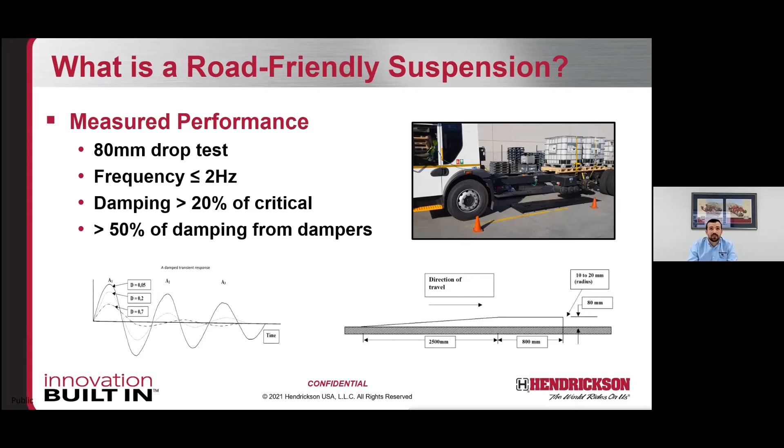Why have road-friendly suspensions? Why are they a thing? Well, it's to protect the road, as the name implies. I'm not a pavement expert, but at a very high level, the basics tie into the damping requirements.

Basically what the damping does is — you hit a pothole, you get a bounce, and then it's how large are the bounces and how many bounces you get subsequent to that initial input from a pothole. So reducing the size of the oscillation means having a high enough level of damping.

And then it's the distance between the oscillations. If you hit a pothole, how many times, or what distance from that initial input is the next input, and the next input after that — that ties into road damage. If you've got a lot of high impacts close together, that's more damaging than a high impact followed by a good distance until the next bounce. So that ties into the frequency component of the requirements I mentioned on the previous slide.

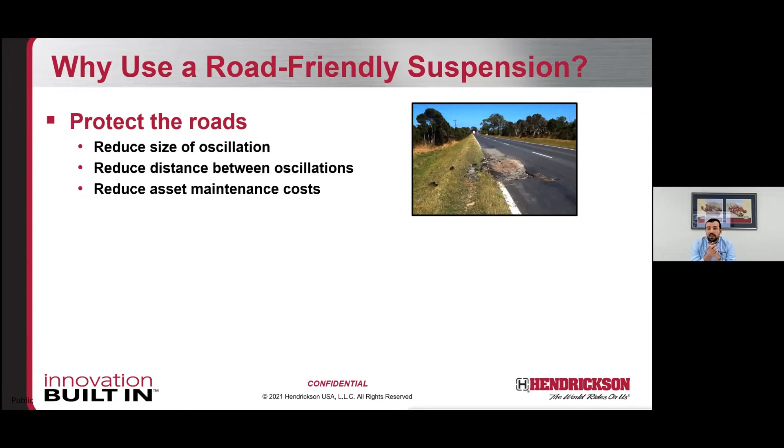All of that basically reduces the cost to asset owners or road owners in maintaining roads and fixing potholes, etc. If you own a road, that's a great thing, but you want to incentivise the operators who own the vehicles with these suspensions to comply. So the way they do that is to give operators more payload or higher axle loads on their vehicles — higher mass limits is the main scheme used as a mechanism for doing that.

I'm sure a lot of people listening are familiar with that scheme, but there's a number of requirements to running higher mass limits, those higher axle loads, one of which is that the suspension is road friendly. Mass management is required. In some states, Intelligent Access Program or IAP is required, where there's some tracking on vehicles. And there are some limitations around the different roads you can travel on.

There are actually other schemes as well which don't require road friendly suspension, which maybe is a little less known. CML, concessional mass limits, is another tier within this system, and that doesn't actually require road friendly suspension. So it's only the top tier, high mass limits, that requires that. There are a few other schemes that tie into road friendly, but the main one is HML. As I mentioned, it's all based around improving productivity for the operator and end user, carrying more payload on the same truck.

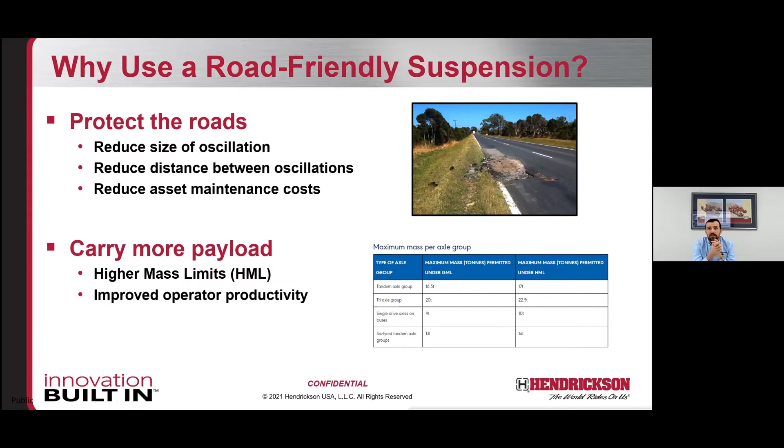Most people watching this presentation are probably interested in Australia, but as some background, which does tie into how it's been implemented in Australia, road friendly suspension was first introduced in Europe around 1996 under a directive shown there, if you want to look it up. The intention in Europe, as I understand it, is to show equivalency to air suspension. So air suspension is deemed to comply, meaning there is no testing and compliance of air suspensions in Europe for road friendly. Another alternative pathway to getting extra mass on the axles is also to have a load sharing suspension. It's the same but different, and there's probably a lot less prevalent use of road friendly in Europe as a result of those alternative pathways.

Another small difference is that hydraulic dampers are specifically called out in Europe, whereas I'll talk about Australia in a minute. Multiple test methods were defined in that framework, and I'll go into a bit more detail now on those test methods.

You saw on the first slide an image of a step that was 80 millimeters high. Basically, you can drive over that step at that profile at 5 kilometers an hour and measure the response - that's one method. Another method is you can lift the chassis by 80 millimeters, leave the axle on the ground, drop that chassis, and measure the response there. The third method, specifically called out, is pulling the chassis down to 1.5 times the static maximum axle load, letting it go, letting it oscillate, and measuring that response. And then there's a fourth method, which is basically any other method shown to be equivalent and approved as being equivalent to those methods mentioned.

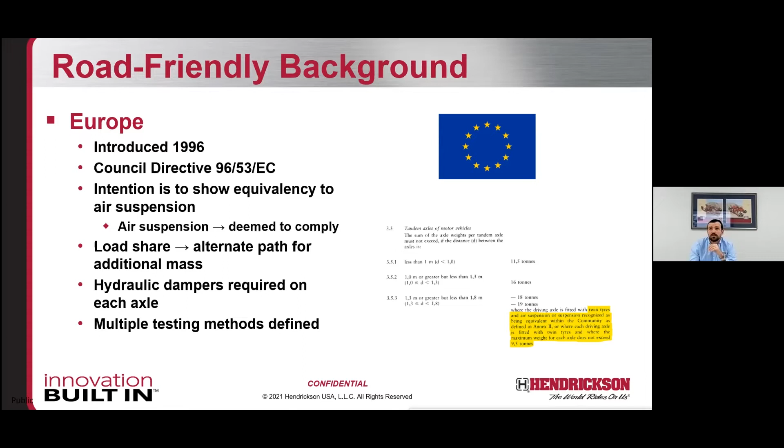So that was all defined within the European framework, and it's called out in that document referenced up the top there. Moving on to Australia, which is probably what people are more interested in - it was introduced not long after, in 1999. It's outlined in Vehicle Standards Bulletin 11, or VSB 11 as people talk about it most commonly, and it's actually a national code of practice.

A couple of differences to what's in Europe: air suspensions are not deemed to comply, hence they need to be tested to meet those criteria. I mentioned before there's a hydraulic damper requirement in Europe - there's no specific requirement for hydraulic dampers in Australia. Load sharing is required within 5% between axles, which is an addition to the Australian requirements.

But the test methods are actually just adopted straight out of the European requirements. As an annex or appendix to the VSB 11 document, the European document is appended in there, with the specific parts that talk about test methods and a few other things. So that's purely taken straight from Europe - they're exactly the same in terms of how you test.

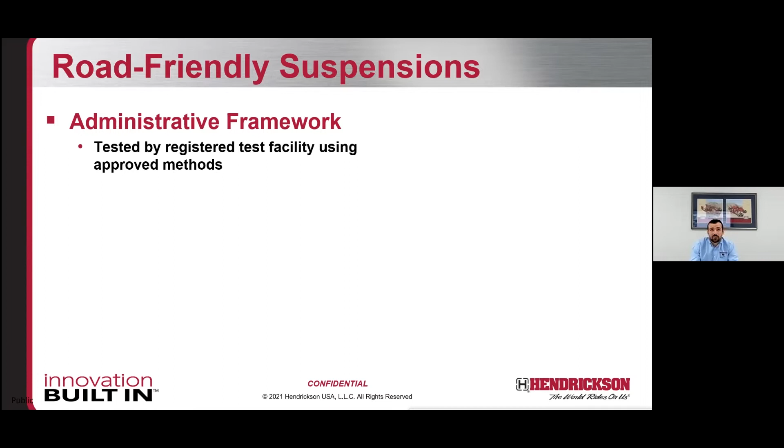So how is it administered in Australia? Basically, in order to test a road-friendly suspension, you need to be a registered test facility - you can't just be anyone with the ability to do so, you've got to be registered. Once the test is completed, it needs to be reported and submitted to the department, which tends to change names fairly frequently, but I think it's currently the Department of Infrastructure, Transport, Regional Development and Communications. They review the report and make a decision on whether it's approved or not based on the information in that report. Then they'll assign a unique ID, an RFCN, Road Friendly Certification Number, and a certificate gets posted online.

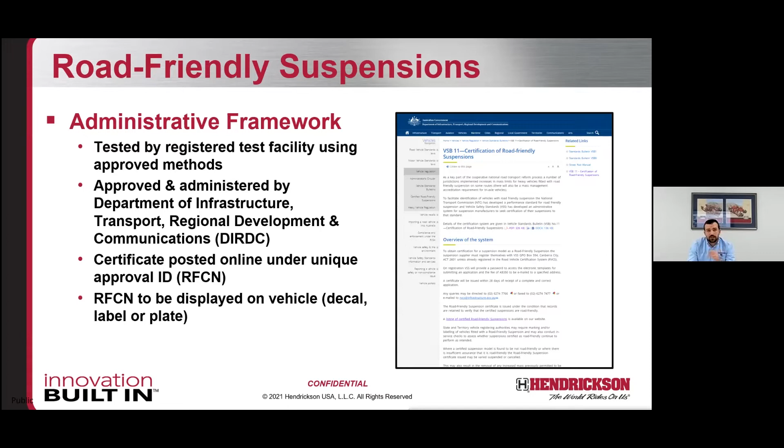Another requirement is that the number is actually displayed on the vehicle for it to be considered road friendly. I'll go into what's posted online on the next slide in a bit more detail.

There's that ID number for that suspension, and a number of variants you can add to that certificate, and for each variant the specific parameters are called out. So the number of axles, the type of suspension, whether it's overslung or underslung, maximum axle spread within that suspension if it's more than one axle. The damper part number is specifically called out, the smallest size of the tyres, the highest tyre pressure you can run, the air spring or airbag diameter, and then a reference drawing which outlines the dimensions and installation of that suspension.

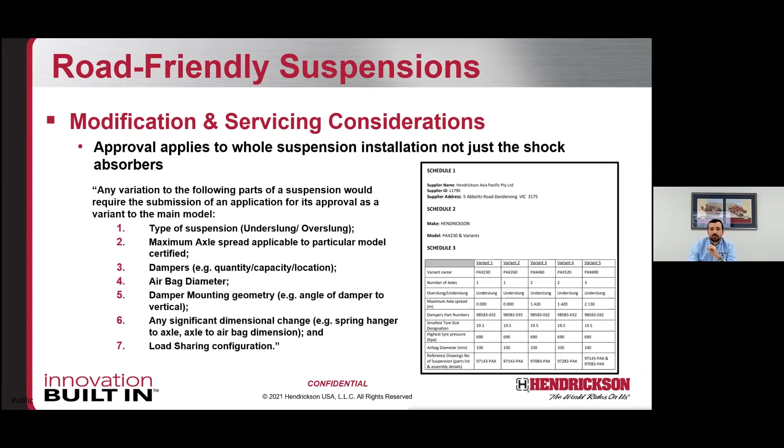If you change the shock absorber, even if it's from the manufacturer but a different part number, it has to be listed on the certificate. If you changed an air spring, all those sorts of things would mean a new variant or that particular certificate would need to be updated, which is also possible - you can submit a variation on a variant if you've changed something and it still complies. So that's the framework you're working within to stay compliant.

Moving on from some of that dry stuff to something I enjoy a bit more, which is suspension design. I just thought I'd briefly talk about some of the implications on designing suspensions in terms of road-friendly and meeting those requirements.

The main thing with road-friendly suspensions in terms of design that might be different to non-road-friendly designs - it may not be, but typically you might need to add more damping in order to meet that damping requirement of 20% or greater. So if you add more damping and leave the geometry the same, say you imported a suspension from another market that had a lower level of damping than 20%,

and you wanted to maintain where the shock absorber was mounted - say it was a suspension with a shock absorber providing the damping - then you would need to increase the force on that shock absorber, or at a particular velocity, or the performance curve on that shock absorber, to get a higher damping level.

Then something you need to consider is the strength of the mounting points - that's a key consideration in that scenario. The suspension might be designed from scratch to already have that level of damping, and it may be okay. But if you bring in a suspension with lower damping and need to increase it, the mounting points might need to be stronger.

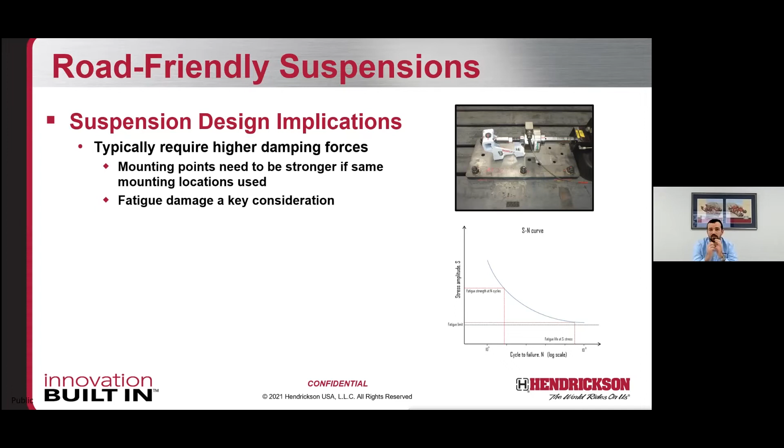And then for air suspensions, it's typically the damping that's a focus. So an air suspension would typically have a lower spring rate, and that's because it's a variable spring rate by nature. It's controlled based on ride height. And so as you increase the load, the pressure increases and therefore the spring rate increases. And so that allows you to have a lower spring rate because it adjusts to what's required to carry the load. So generally your focus would be to make sure you're meeting that damping requirement.

For a mechanical suspension, it's typically a more fixed spring rate, and therefore the maximum capacity of that suspension would typically drive the spring rate, meaning it's typically a higher number. And therefore, to meet the road-friendly requirements, you might also need to focus on that frequency criteria as well as the damping, given you would typically have a higher spring rate for those types of suspensions. So those are some of the considerations depending on what type of suspension you're looking at in terms of ensuring it meets road-friendly requirements.

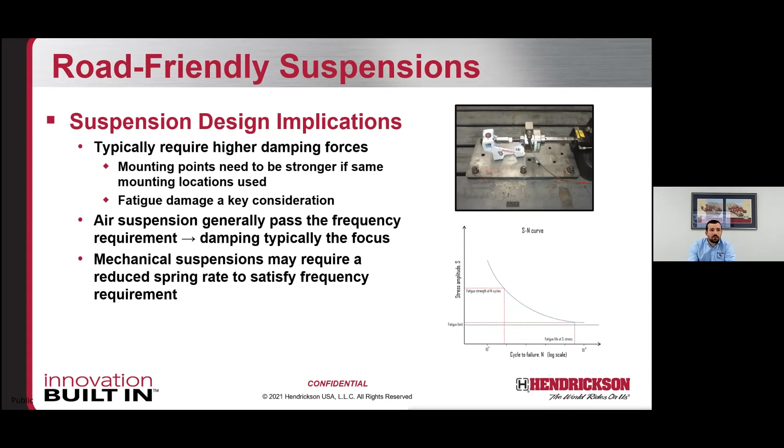And then finally, some main considerations to take away when installing or maintaining a road-friendly suspension. So has it been designed and validated for road-friendly levels of damping, which I spoke about in terms of fatigue, and if you're taking a non-road-friendly suspension and turning it into a road-friendly suspension, have you considered the full life of that suspension and whether it can withstand those loads?

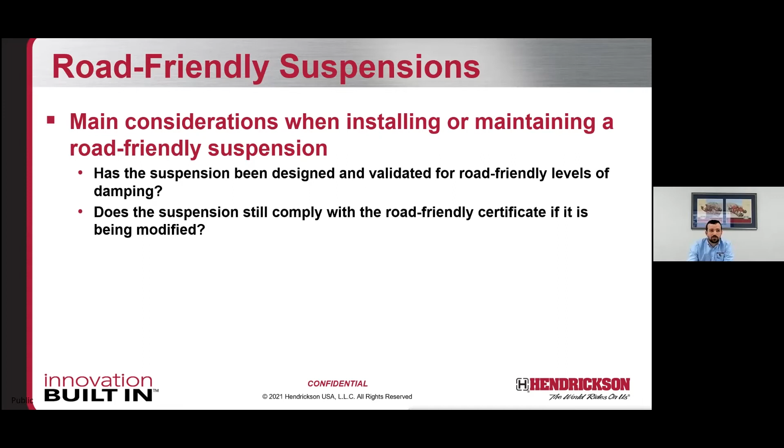And then if you're maintaining it, does it still comply with the certificate? So have you changed the geometry, or have you changed the part from what was listed on and certified on the certificate if you're going to maintain and modify in any way?

And then another point is suspensions often will have attachments that directly attach to a chassis or a cross member, rather than being self-contained within the suspension, depending on the suspension itself. So it's also important to consider whether the chassis, the cross members, the attachment points can also take the level of force going through the suspension if it's transmitting a higher load through particularly the shock absorbers generally. And for shock absorber mounts, is a doubler plate required behind the shock mounts, or is there some sort of extra reinforcement required?

So yeah, they're probably the main things to consider. And yeah, I hope that presentation has given you something new, something useful, something to consider. I look forward to receiving some questions during the conference if anyone has any that they want to ask. So I might hand over to Adriaan to talk a bit more about shock absorbers and road-friendly suspensions.

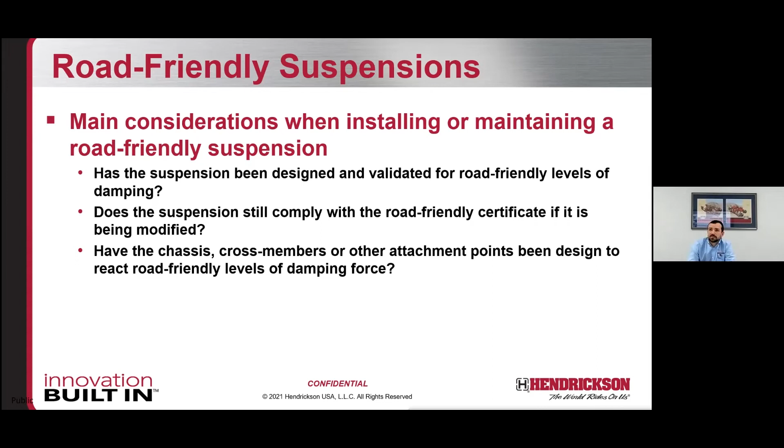Thank you, Luke. Hi everyone. As Bob said, I'm Adriaan. I'm engineering manager for Powerdown, Australia. I'm really excited sharing this session with Luke, and I'm looking forward to some interesting conversation around this fairly technical topic around road-friendly suspension.

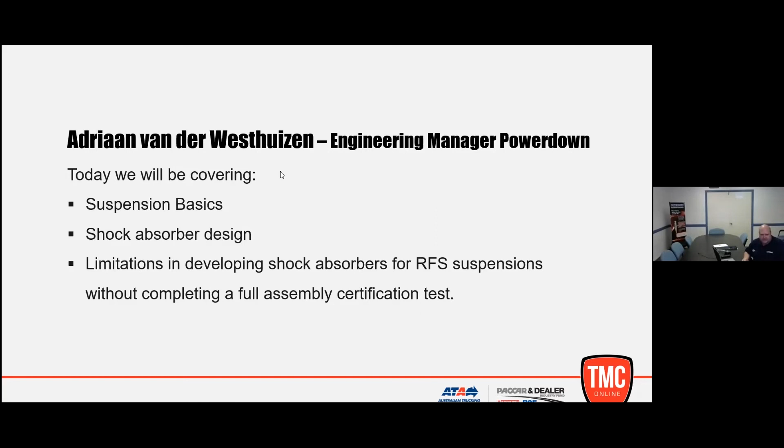So I'm going to kick off just covering some suspension basics, some basic shock absorber design, and then I'm going to talk about the limitations in developing a shock absorber for RFS suspension without completing a fully assembled certification test.

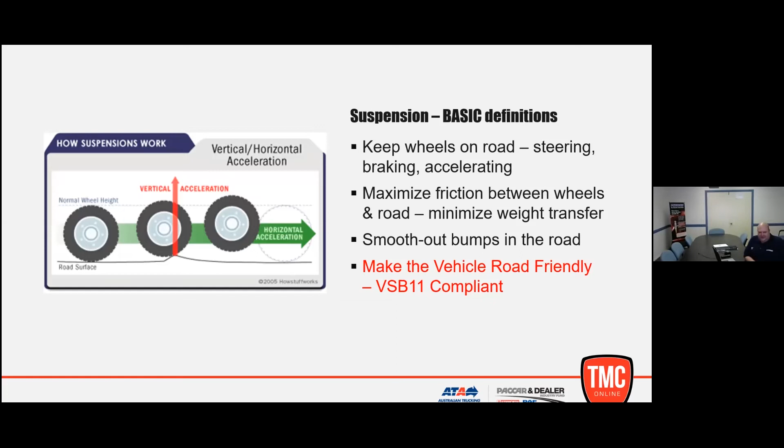So just quickly on the suspension side of things. Your suspension needs to keep your wheels on the road, so we maintain good friction that allows us to corner and brake. To a big extent, the suspension also provides some comfort to smooth out some of these vibrations. And for today's topic, very importantly, your suspension is a big part of making your vehicle compliant to VSB 11, or road friendly.

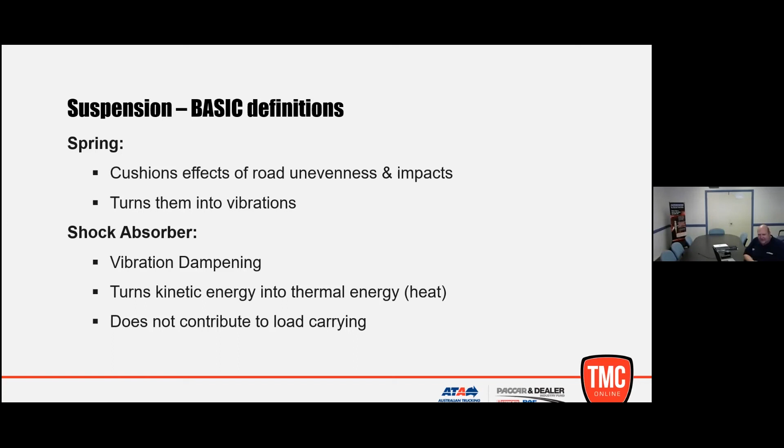So basically the springs allow that cushioning. They carry the load and absorb unevenness in the road, but a side effect is they turn these motions into vibration. The shock absorber is then tuned to remove these vibrations, to dissipate that energy. It's important to note the shock absorber does not contribute to the load carrying capability of the suspension. Fundamentally, there are two main types of shock absorber designs.

They're mainly twin tube or monotube derivatives. We'll see on modern trucks the new Tesla truck seems to use some sort of monotube technology, but predominantly, especially in the Australian market, twin tube shock absorbers are the go-to technology.

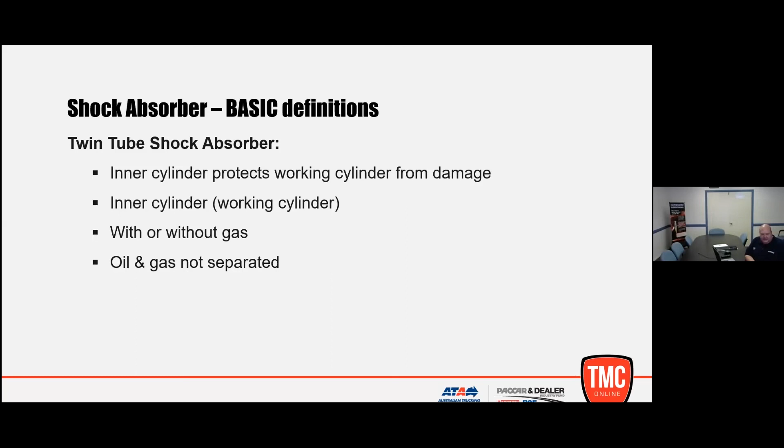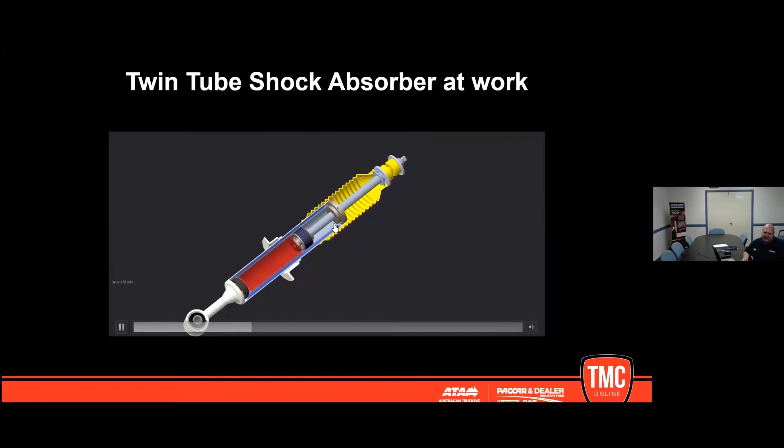For twin tube shock absorbers, you've got two tubes - an inner and an outer tube - with different configurations, with or without gas. As per this video, this is a twin tube design, more like a strut type style, but you can see the inner tube with lots of valving. We'll talk about that later - the main piston as well as a floating piston. On the outside we have this reservoir tube, which displaces the oil as the piston rod enters the body. For a monotube, we only have one cylinder, and the gas and oil never mix.

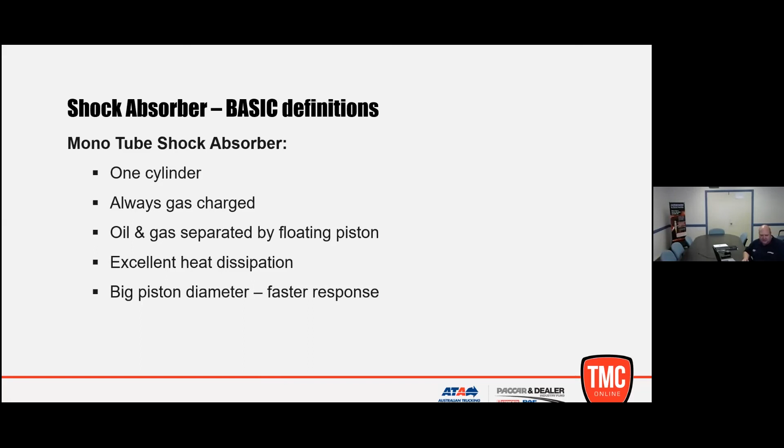It's got better heat dissipation and a bigger working piston for the same body size. On the truck side, I think the common application for this is some Kenworth cab dampers, which use monotube technology. So you can see the main piston moving inside - you've got an oil and gas separator with a floating piston, and all your valving happens on the main piston. So there's no foot valve in this design.

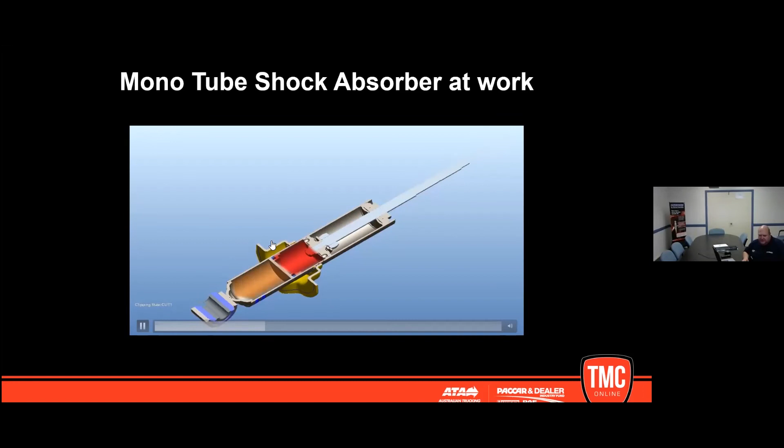So just some characteristics of the shock absorber - we've got the length, the collapsed length and the extended length, called the stroke, and mounting points. Very important, like Luke mentioned in his presentation, is how this damper basically mounts to the vehicle and to the axles. Your mounting bushes, your selection of those materials and design, also plays a big role in how vibration is translated into the rest of the structure.

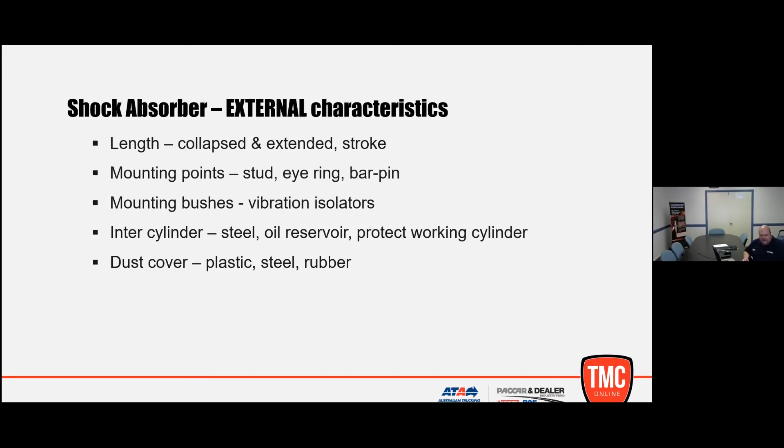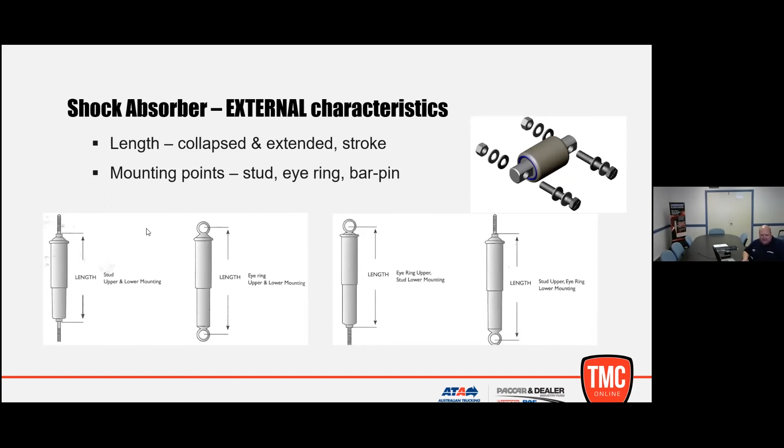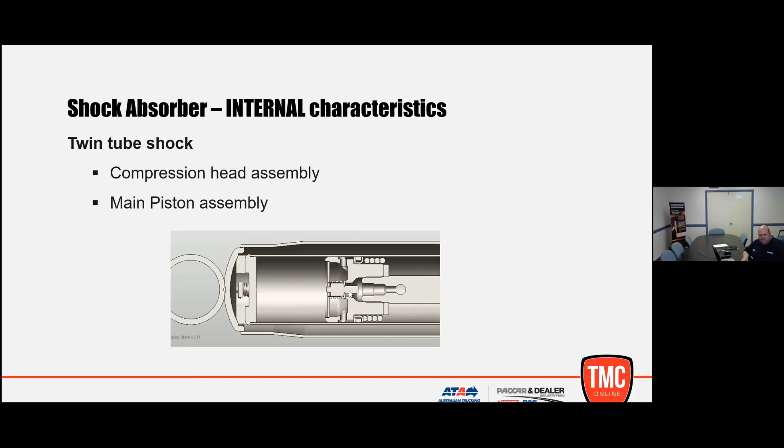Internally, if we look at the shock absorber, as we said a twin tube, we've got this foot valve which plays a big role in your compression valving, and then you've got the valving on the piston. So there are lots of different designs to deal with the recoil damping, and then obviously some compression dampening happening on the main piston as well.

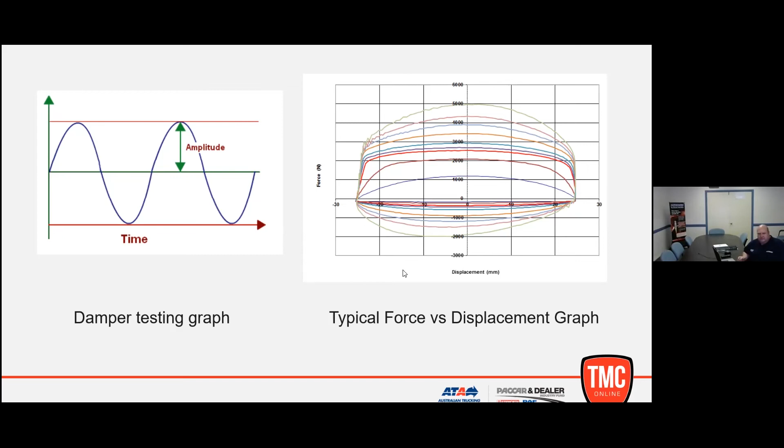So how dampers are tested is basically we cycle them through a sinusoidal displacement graph programmed at a set frequency, and then we can record the forces generated. According to international design standards, this is a typical force displacement graph. Each of these lines above zero basically represents a recoil damping force at a velocity. Under the zero mark, the negative forces are compression forces generated by the damper at specific velocities. These velocities are really important when we design the damper for road-friendly suspension, so we'll get to that.

The typical shock absorber today has got fairly intelligent valving, if we can call it that. It's speed sensing, so it's non-linear is what I want to highlight. The damper reacts differently at different velocities. So if we talk about the non-linear characteristics for a shock absorber, it means you're not going to have a set output of force relative to the velocity - it can adjust itself through a wide spectrum of velocities.

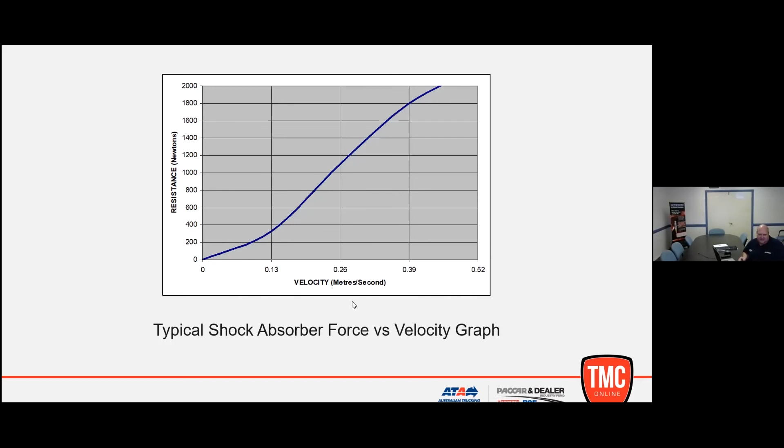So a typical self-adjusting or speed sensing damper will have a basic orifice stage - all these stages are fairly important when designing a damper for road-friendly suspension. At the lower speeds and lower velocities, those forces we generate we call the orifice stage. Then there's a blow-off stage at medium velocities, and then we go into a restricted stage at higher velocity - that's the amount of oil we can displace through a certain design.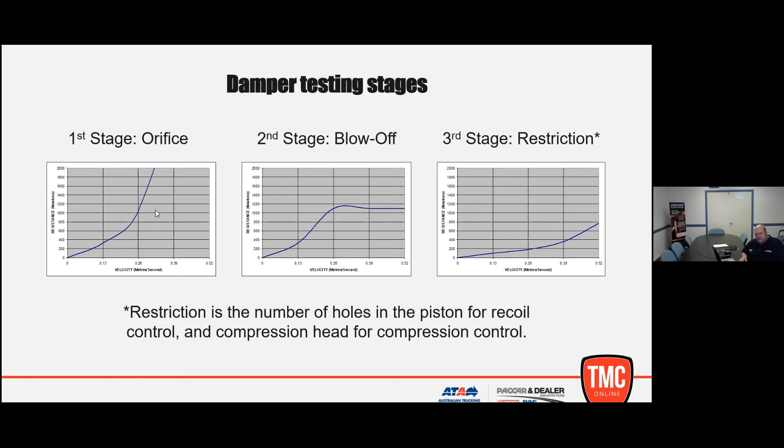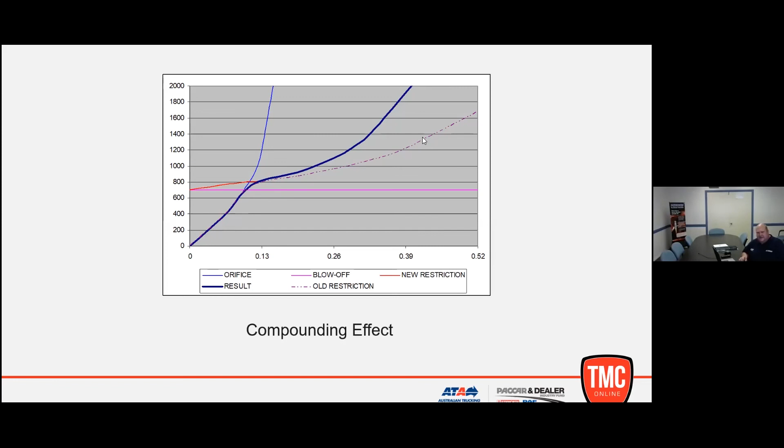Okay, and this is true for basically the compression and the recoil cycle of a damper. So if we combine all those three stages - the orifice stage, and then as we go into saturation and blow off - combining all three of those, we basically get our recoil and compression damping curves. So it's got this compounding effect.

Lucas covered this in detail, so I'd just like to highlight what he said and how the damper affects it. The suspension needs to oscillate below 2 hertz. I want to mention that if we overdamp the system, we can actually increase that frequency. We can have a compliant suspension spring rate, but if we overdamp the system, we're going to start increasing that frequency. Then we'll talk about the mean damping ratio and the different damping ratios.

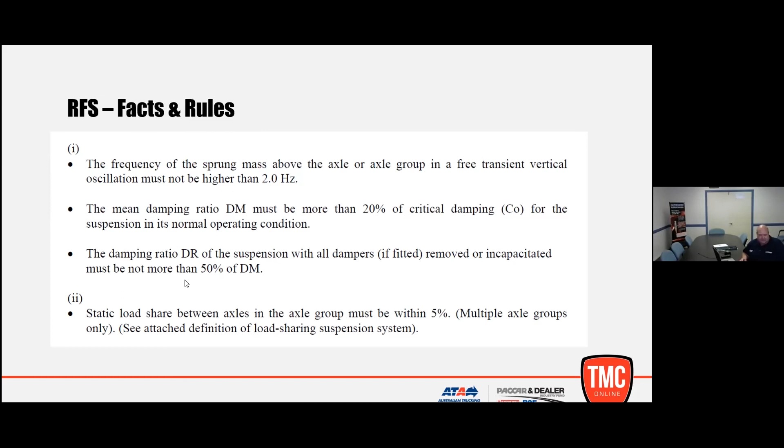Then the static load sharing, that falls outside what the damper brings to the shock or suspension design. On this video here, I've got these little clips. As Luke touched on, if we overdamp the system, it takes very long to return to the static position. If a system is critically damped, it will return to the static position in the shortest possible time. If we underdamp the system, we see this oscillation happening with a decrease in amplitude of that motion.

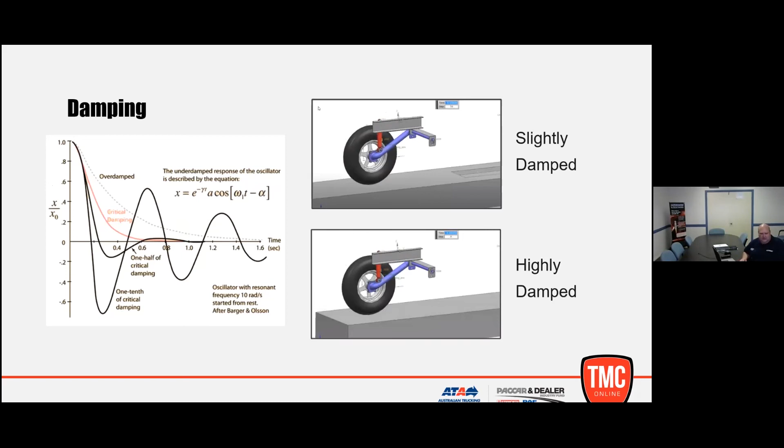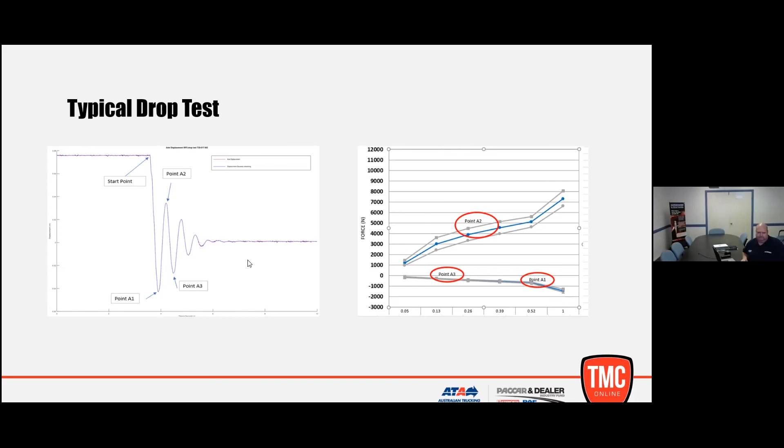So that's in principle, in basic terms, how we adjust the damper and the damping forces relative to a drop, or to a suspension, basically using the VSB 11 test method. Thank you, I'm looking forward to some questions as well.

Thanks, gentlemen. Well, Adriaan, I'd have to say that was a shocker presentation, in a good way. In a good way? In a good way.